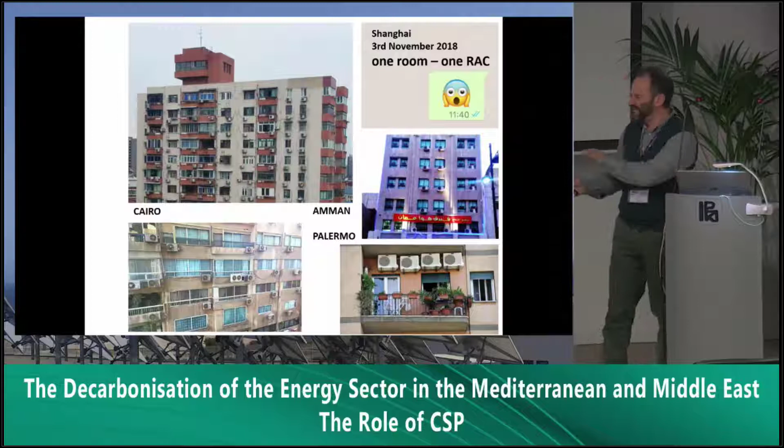But it's exactly the same I saw in Cairo, in Amman. This is a picture of Palermo, typical solution. A family has to cool the house. They buy 4 units and they install them. I had no time to make one here in Nicosia, but I think it's exactly the same. And this is what's happening.

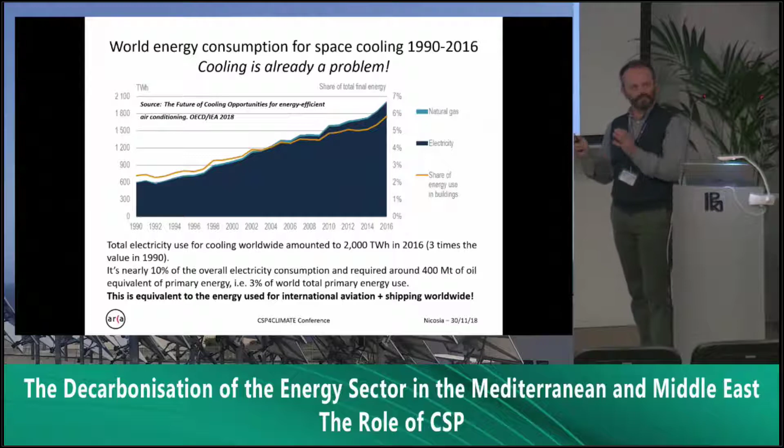The quantity of energy that is absorbed by the cooling of buildings is growing in this way. It's 3 times since 1990 up to 2016, and most of this demand is answered by electricity. So now we are more or less at 10% of the overall electricity consumption, and this sector is already a big sector in the energy basket. So we should consider it, I think, by now in a separate way. It's not just part of the building basket.

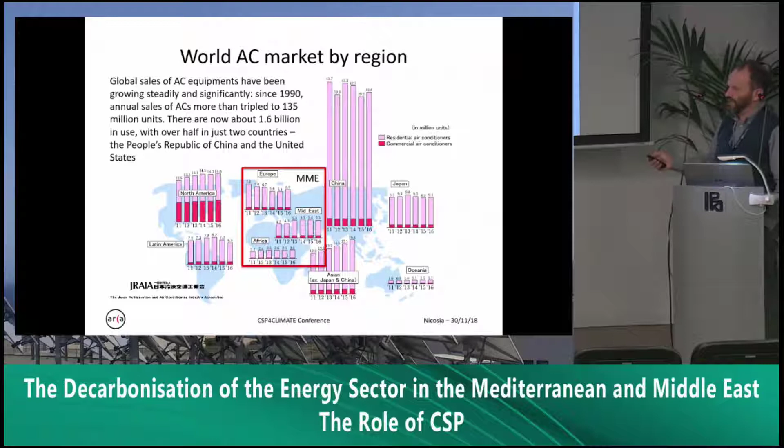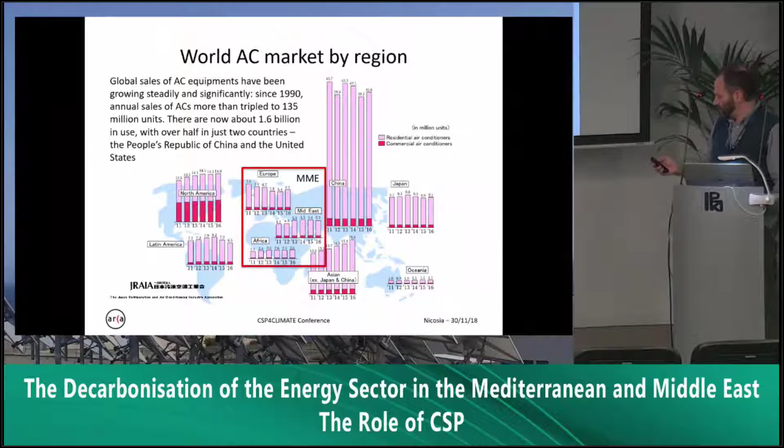What's going on with the market? Most of the market was in North America and in Japan. We have seen impressive growth of this market in China. So China is driving the market now, but I would say that the Mediterranean and Middle East, if I consider that Europe's demand is mostly in Southern Europe, and the Middle East and most of the North African countries, if you add this, you have the same role in the market as the American AC installations. This is from a couple of years ago, very updated.

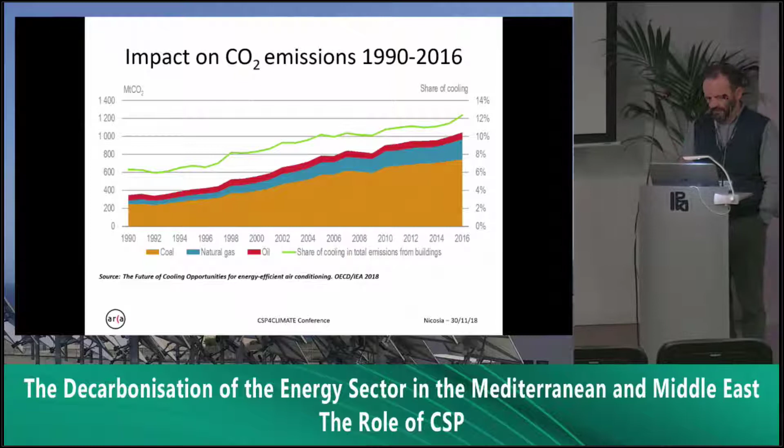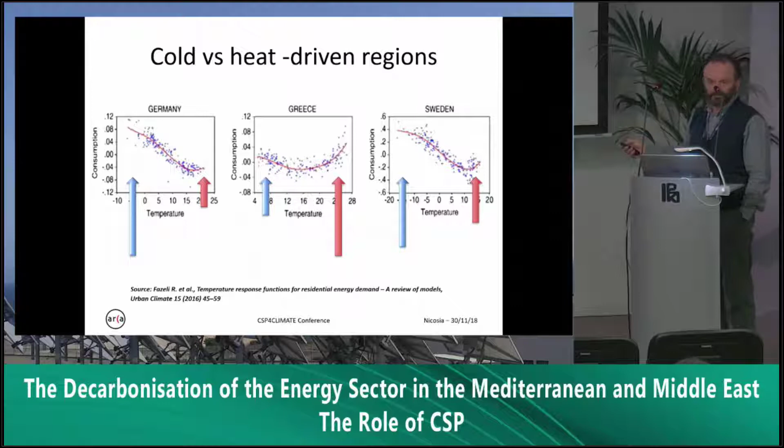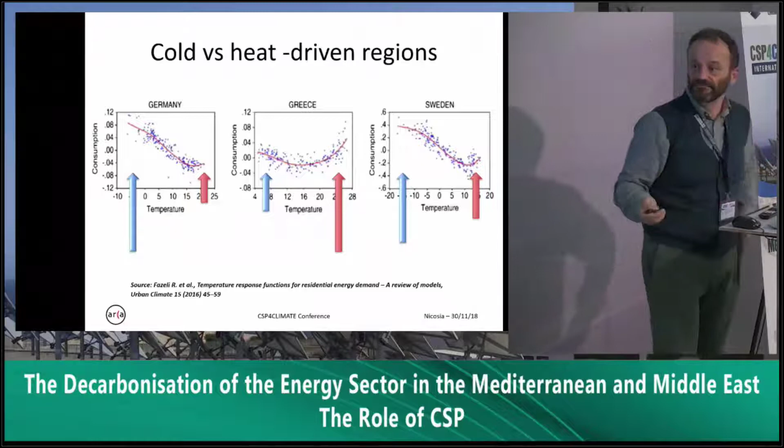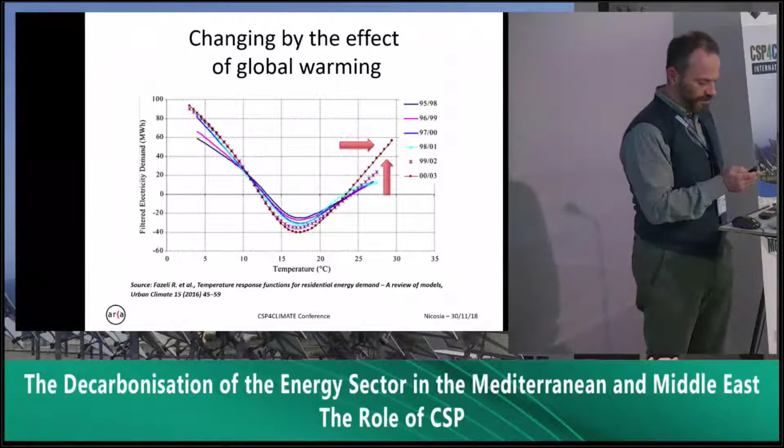In Germany, they have started suffering here because of the heat waves in summer, and the same is in Sweden. So there is a strange new market coming on in the northern countries, for very short periods, having the AC to stay at home and fight this week of heat waves. But the general change in the shape of this curve is showing that we are going up and moving to higher temperatures. So the problem is going to be quite bigger in future.

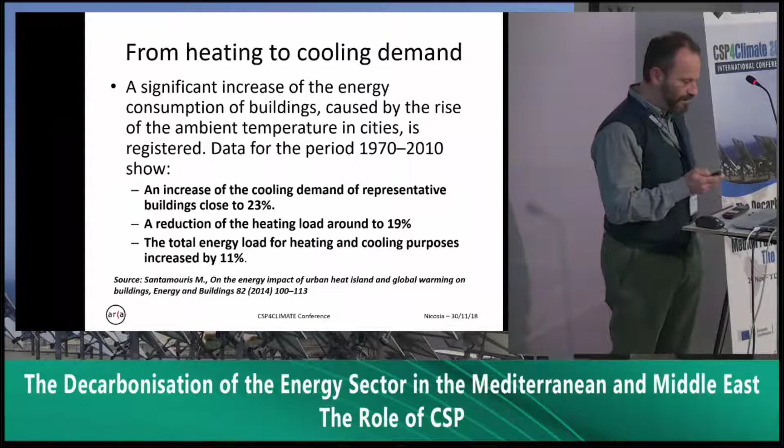That means in collecting all the data, this is a nice study on data on buildings for 40 years. The increase of cooling demand in the buildings that have been analyzed was about 23%. And there was a reduction of the heating load of 19%. So the balance was that at the end, we need more energy for heating and cooling, because the cooling need is growing quite faster than the reduction of heating. And this is pushing the market.

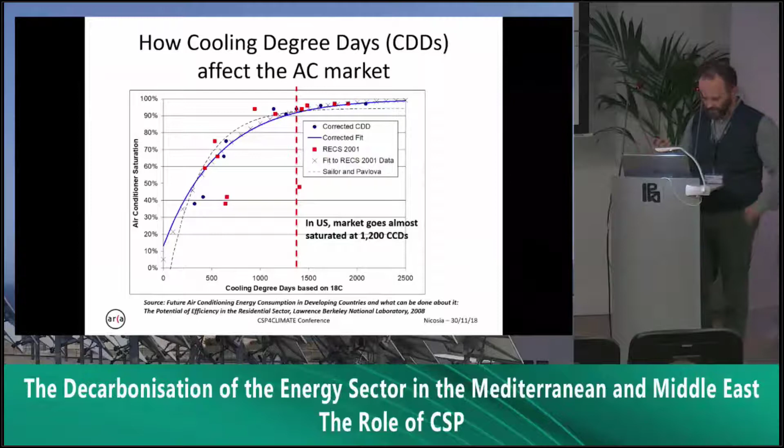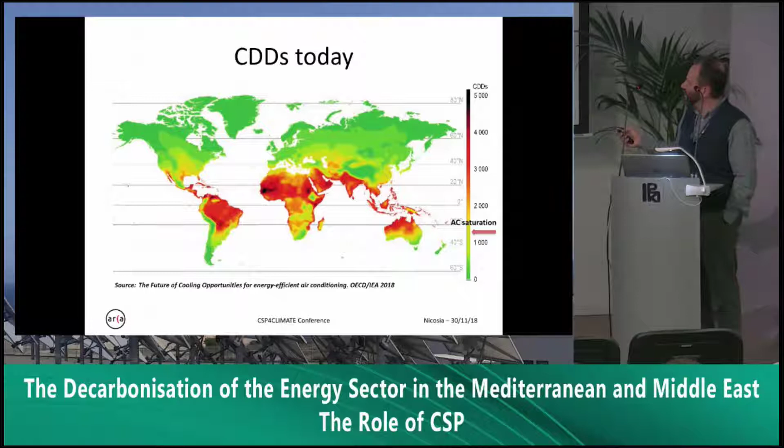This is the picture of the CDDs today. So we understand where they would like to have air conditioning, and it's nice to see that in the United States it's not so heavy, but it was the biggest market in the world. China is growing, and again the China affected area is more here in the south. But this is the change in the baseline scenario. So we are going to expand the CDDs as an average worldwide of 25.4%. And we are going to be hotter in the hottest place.

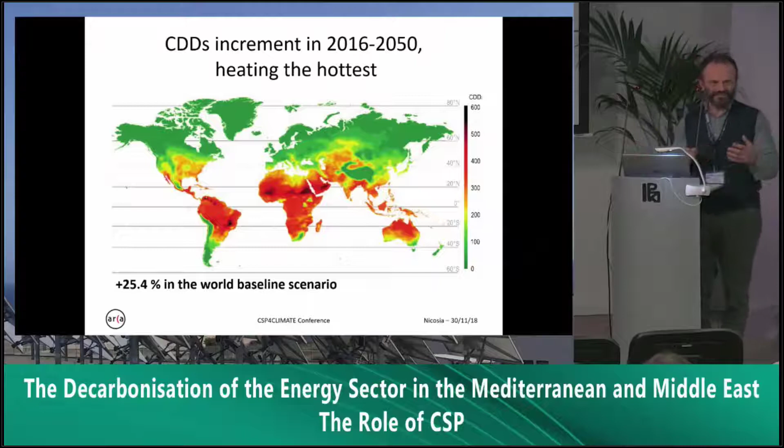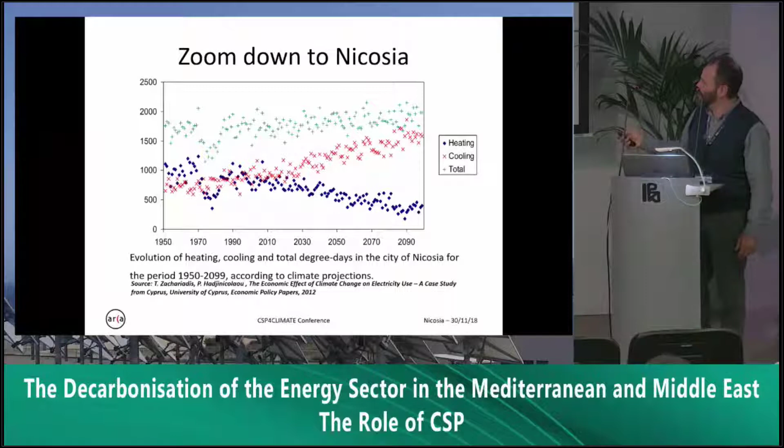So what is going to happen? This is what is going to happen. I picked this yesterday from the presentation about the data here. It's clear that we are going to diverge. And in Nicosia, these are the CDDs in near future. Here we are more or less in the, let's say, balance between heating and cooling. So if the income is going to grow, nobody would say we should keep people poor, because this would be a solution. Let's keep people poor. They will not buy the air conditioning, and the market will be affected just by money.

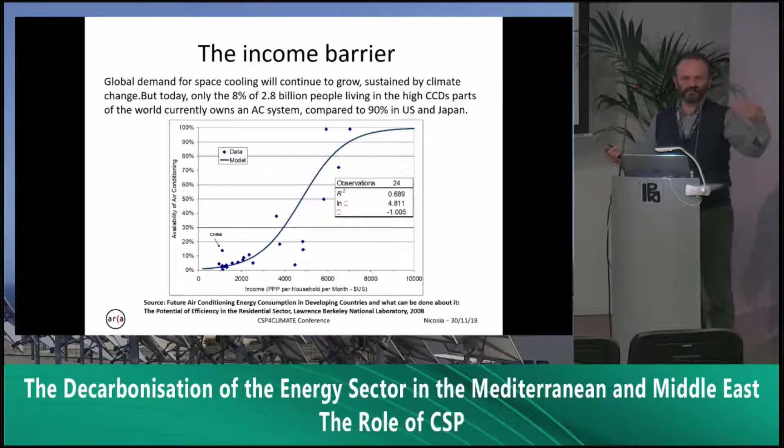But if you see this curve here, this is again a threshold. So when the PPP per household per month is more, let's say, than 5,000 USD, they buy air conditioning. So again, the saturation is a product of CDDs and income. This is the basic model. And about 2.8 billion people are in areas where they would need an air conditioning unit, but they have not the money to buy it. So with this shift, when people get into the market economy, they will buy this unit.

That's quite interesting in this research by the Lawrence Berkeley lab, that the potential of Egypt, even if they have something not far from 1/4 of the population of the United States, the potential demand, if there was not a barrier in the income, would be 60% of the United States. That is an unbelievable size of market for AC.

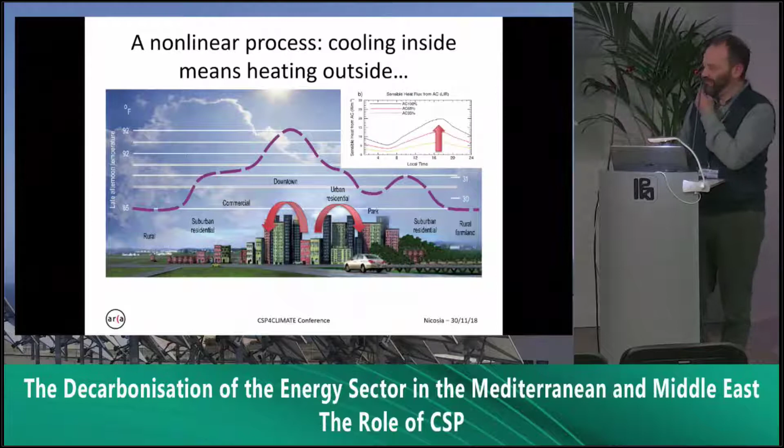We are using greenhouse gases to build the units. So we shifted from the CFCs. Okay, so we are saving the ozone layer, but we are using gases that are 4,000 times more affecting the greenhouse effect than CO2. So each time we install a unit, we should think about where this gas is going, if it is leaking, but even at the end of the life. And of course, this is creating heat waves, and people want more AC, and then you have the crash of the grid.

For example, in Saudi Arabia, the weight of air conditioning goes up to 70% of the electricity distributed in the grid. So they are producing electricity to cool. So this is my point. Why are we producing electricity just to transform it into cold? Exactly as why are we making electricity to then somewhere else make water? Let's make cold. And of course, this is stressing the grid. You have to oversize it and so on. So it's a super duck effect, if you want.

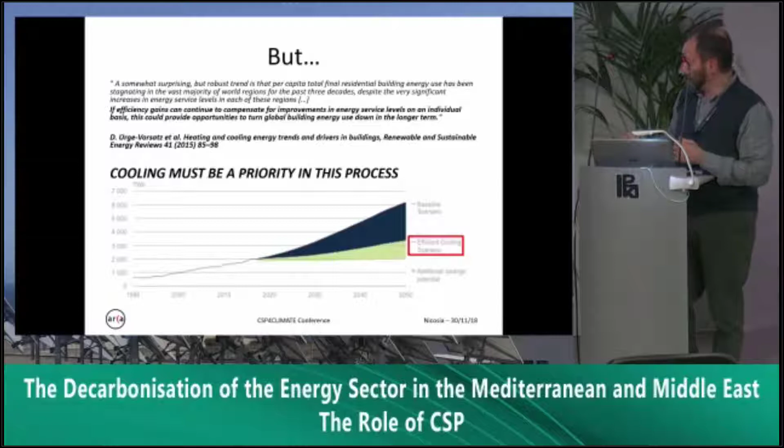I found very interesting that a team in Birmingham University, they are lucky because the professors are in the parliament, so it's easy to talk with the politicians because they are politicians. So this professor in Birmingham has outlined that they had never a discussion on cold in the Parliament of UK, and they should have because of the growing, let's say, economy of cold. It's quite interesting that this, let's say, hotspot is in UK, and I will go back on this at the end of the speech.

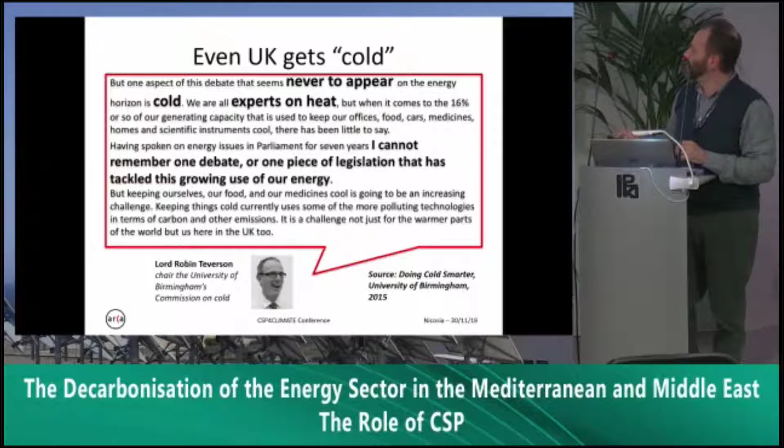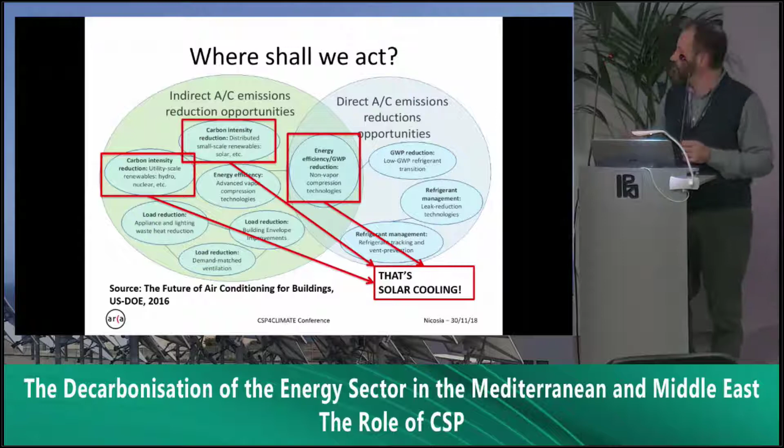We can do quite a lot to improve the efficiency of this field, and we can combine solar technologies, we can combine innovative systems for making cold, and distributed or not distributed systems, but all around the solar cooling concept. Because we are in phase with the demand, so we can play quite a lot, because we will produce when we will have the need. So we can think different, less storage, somehow less transmission, but we have to really think different to work around the cold demand.

We are doing this since very long time. This is a very smart way to make cold where you need cold with heat. It has been invented 5,000 years ago. It's used now. There is a very nice market of this stuff in Africa, in Nigeria, and all around. They call it pot in pot. It's evaporative cooling, and it's keeping the food preserved. So it's a very important social impact, let's say, on people. It's costing nothing.

And there are other examples in the literature of, let's say, old ideas that have been revamped. And also nice inventions from the Mouchot combination of compression and dish to the Tabor work in the 50s, where they were talking about solar energy as the way to keep in these regions things going out from oil and from nuclear. There's a discussion. This discussion was in 56, and also Bozza in Italy.

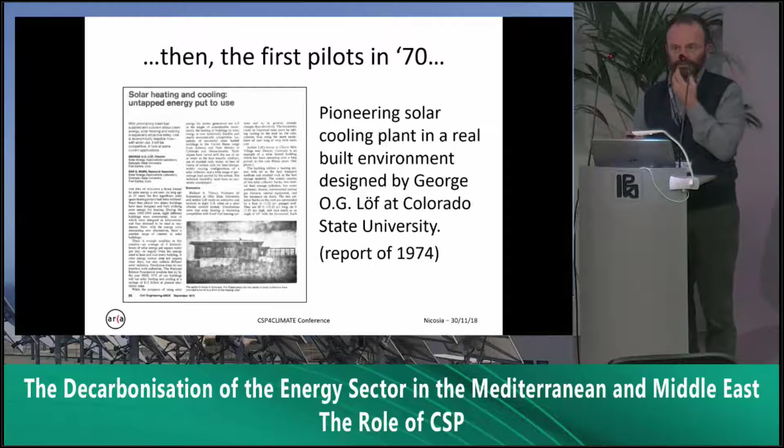Then we had the first pilot plants in United States. It's the work of Löf in Colorado, with a number of installations in houses and in universities. And then a very, very slow, steady, but slow growth. So from the early years of this century, about 1,000 units or plants have been installed. That's something, but it's nothing, because we are still there in the forecast of the adoption of solar cooling that the IEA has, let's say, scheduled in 2012.

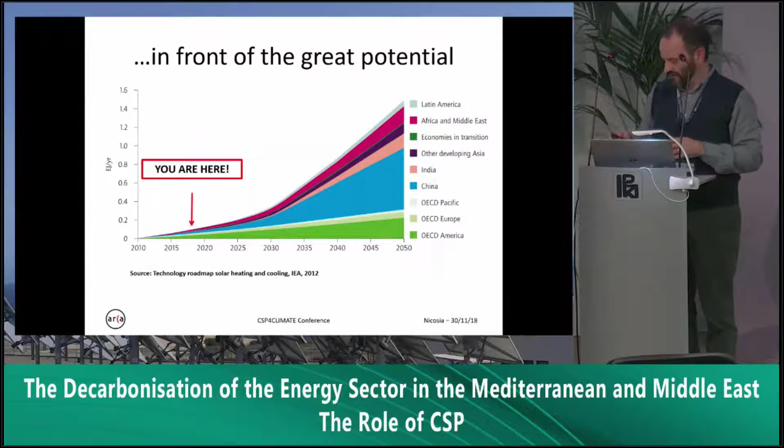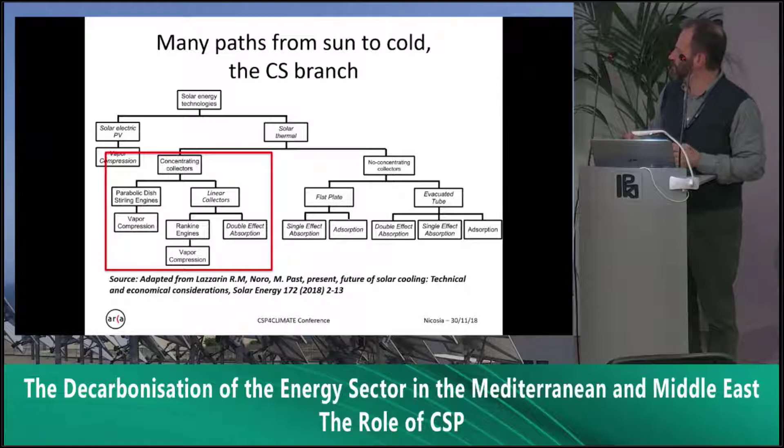Here we are talking mostly about this. So the concentration and the transformation of energy coming from solar concentrated systems. Of course, you have other solutions, the flat plate and the ETC, and you have all the stuff related to PV generation and then use of, let's say, high performance heat pumps. That's quite interesting. I've been comparing the two, and I'm following this game, and I could say that on the efficiency side we are almost at the same level. Of course, PV plus heat pumps at a basic, let's say, installation would cost less, but they will affect in other ways. I mean, we should calculate it better. It's not just about money.

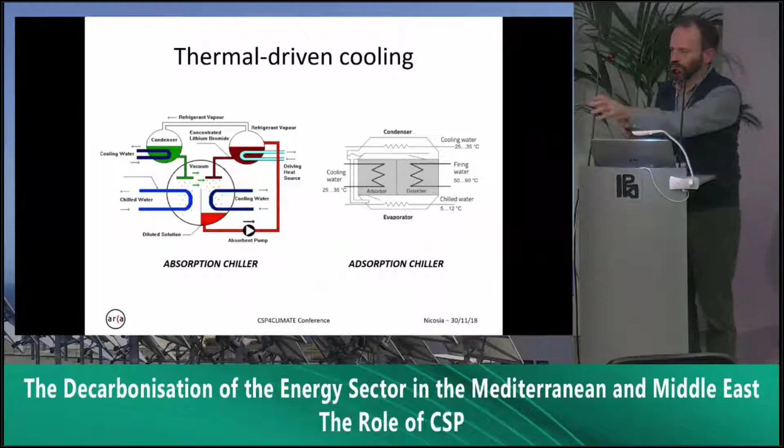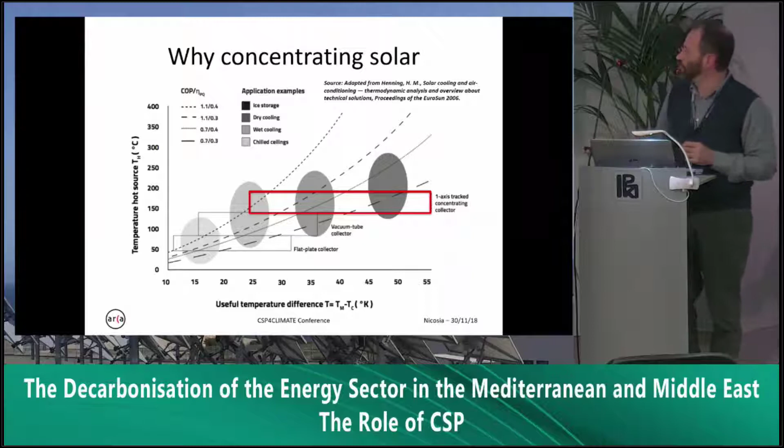These technologies have been improving. They are quite known, so I think there is nothing so important to say here. And with solar collectors, we can use them at the best of their potential performance, let's say, because the concentrating collectors are giving us access to the multiple effect absorption system, so with a quite higher COP, so the efficiency in generating cold from heat. And also we could work quite better if we need storage. So I think that this is one of the solutions we have to pursue.

You can also imagine to hybridize. This is a quite clever approach, I think, that you keep some gas in the system for heating and cooling, and you shift part of the energy that is used for the absorption process from gas to solar. And of course the result in terms of COP on the primary energy is quite better than the performance you would have using the gas in a turbo gas alternator and then going to a compression unit and then to cool.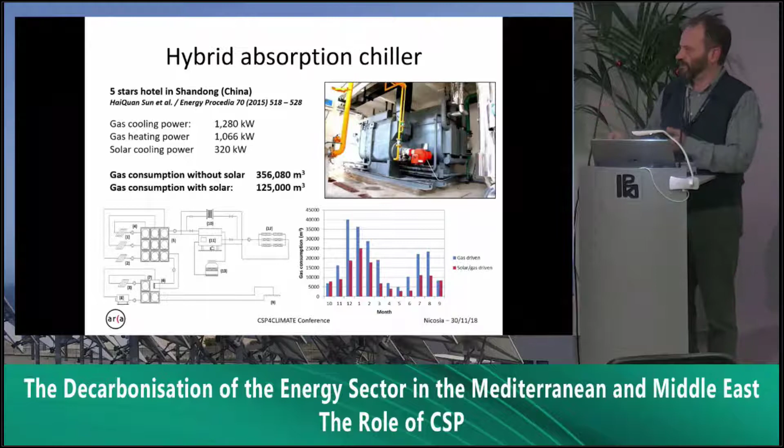Let's go bigger, because the bigger we go, the better it is. In Gulf countries, district cooling is getting in place, and the largest installations are in that area. This is an installation going on in Doha. There are two big ones, owned by, I think the name of the company is Qatar Cooling or something like this. And we are talking about a refrigeration capacity of 690 megawatts. So we are at the scale of a power plant.

So my question is why we are not going to feed it with solar. It's there. Instead of making electricity, we could feed big absorbers or whatever you think is a better technology. But the size is a size that is competing or is in line with big electric plants.

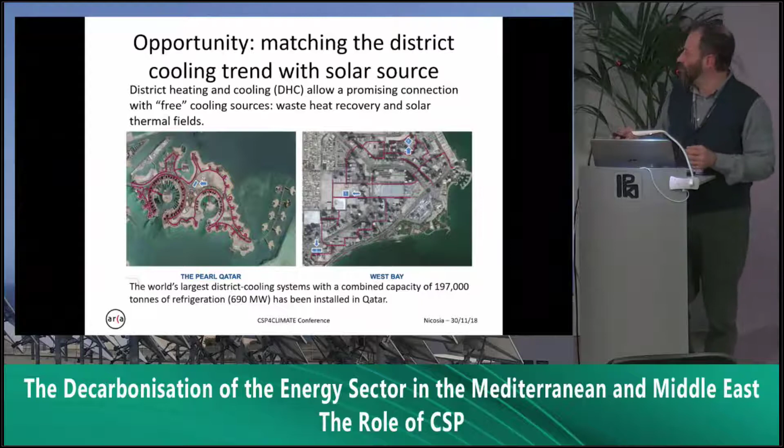This is again about the study I already presented in Saudi Arabia. What is interesting here is that concentration, if you compare it with flat systems like ETC, is working quite well also in terms of cost. So I would go for a strategy on concentration for plants of this size.

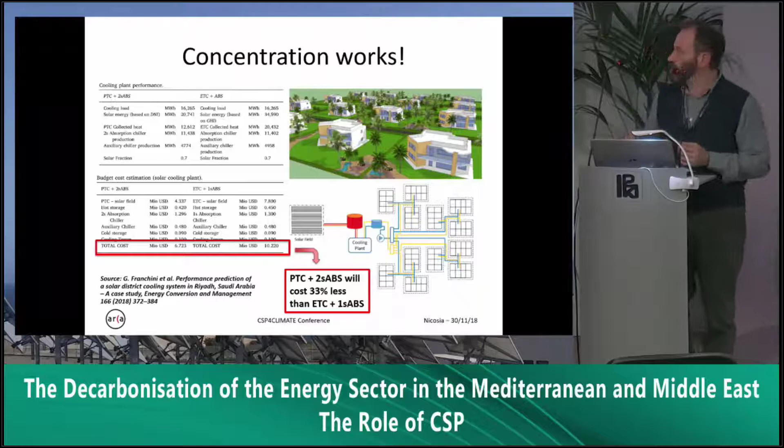We can also introduce polygeneration as the approach. This was the approach of the STS-MED project. I think that Fabio Montagnino will tell us something about that. So we could produce at the same time, or switch from electricity to cold whenever we need it.

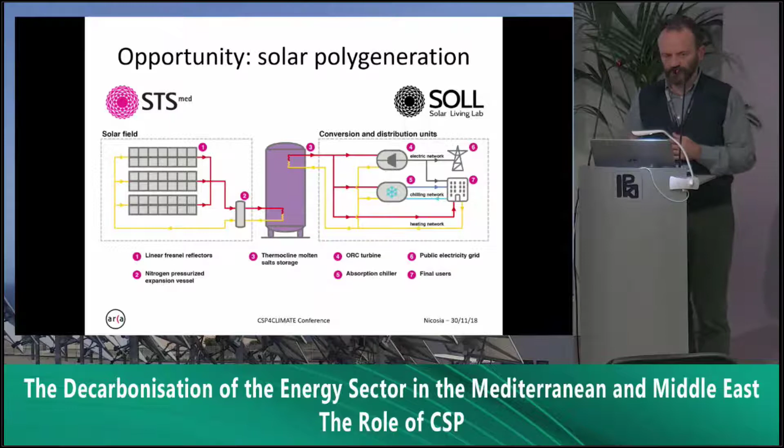And we can also start working quite hard on storage, because sometimes, for example in Doha, I would not talk about heat storage, nor about electricity storage. I would go for cold storage: cheap medium, cycles are never-ending because there's not a big limit on that.

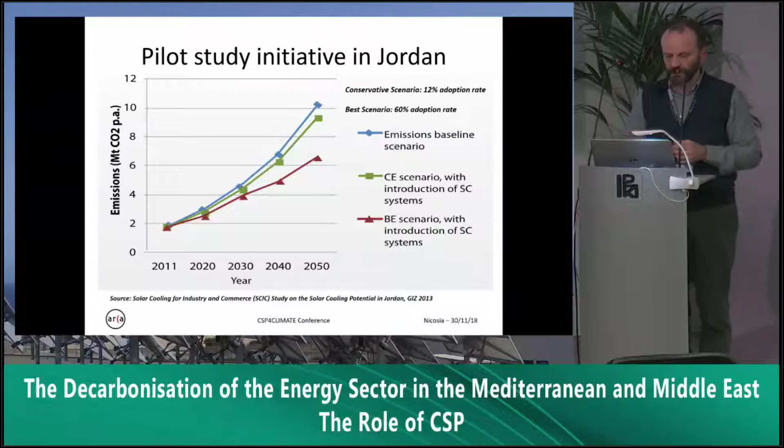We have a lot of problems, of course. This is the result of a questionnaire that was submitted by the SHC, the Solar Heating and Cooling initiative, under, I think, Task 48, to a number of companies, developers and people that were stakeholders of the process. And this is the word cloud of the answers. It gives us an idea of the most important things we have to solve: parasitic power that we are losing, poor design, control problems, complexity, and so on.

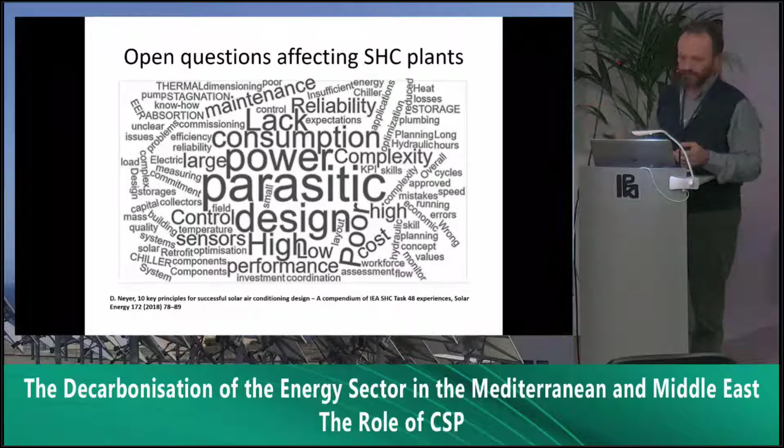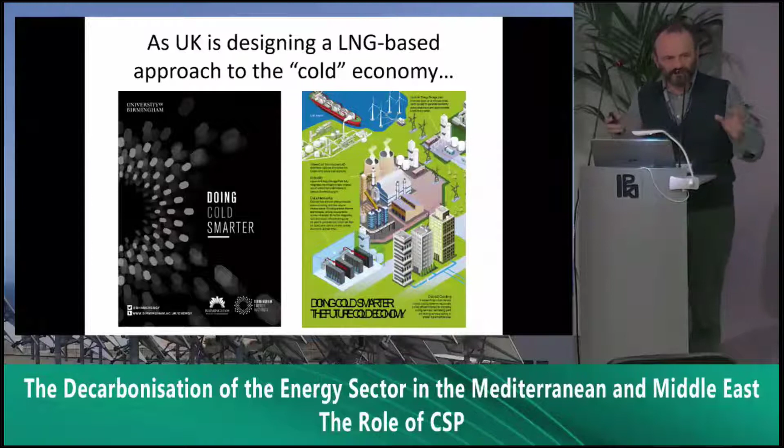But this is the conclusion. In the UK, they are talking about the smart cold economy, thinking about reusing the waste cold from regasifying LNG. They are importing liquefied gas, so they have a lot of waste cold, and they are thinking about a system to keep it and use it.

I think we should start promoting a specific strategy for this part of the world based on solar to generate, manage, store, distribute, and use cold. And so I hope that we are going to see a new season of solar cold in this area, in this part of the world. Thank you.

Another speaker who has respected the time limit. So I see hands already appearing. Chuck, first question. A couple of quick comments that I think reinforce your message, and then a question.

First comment is the Department of Energy decades ago had a national solar heating and cooling program. They had a lot of flat plate collectors running, absorption chillers. They wound up using lots of natural gas. So the conclusion was you really needed a higher temperature collector in order to run absorption chillers, and I think that aligns with what you said.

Also, to reinforce the point about the global warming potential of refrigerants, I don't know how many of you are familiar with Project Drawdown. I recommend going to the web and looking at it. It's a good book. It's 100 different measures to address global warming, and the #1 measure is to come up with a new refrigerant, basically, to get away from these high GWPs.